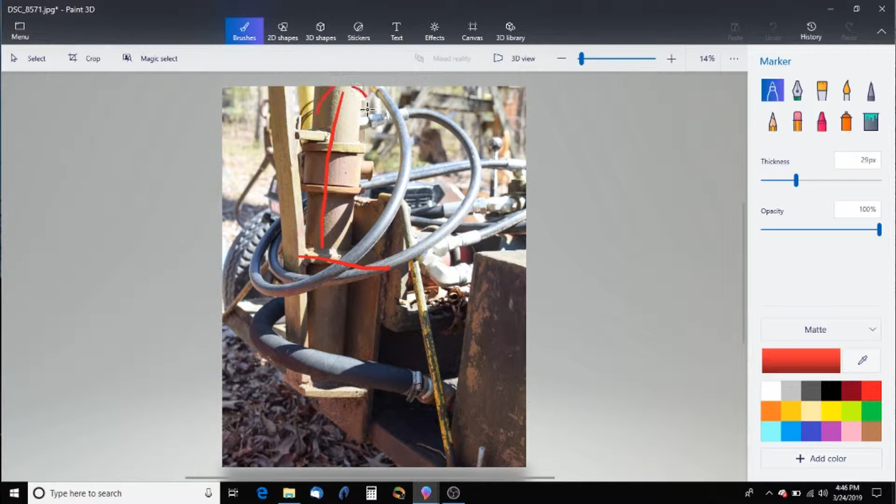The second thing we have is our tube coming down into this plate, and we've got a moment rotating that way for the most part. What happens is we start to form a couple—it's going to push on this side and pull down here. The problem is it's pushing against this plate, and there's not any material on the other side of that plate to take the load.

What we want to do is actually drop this plate down so we can attach right here, into this big member right here. Just push—have that force go right into it.

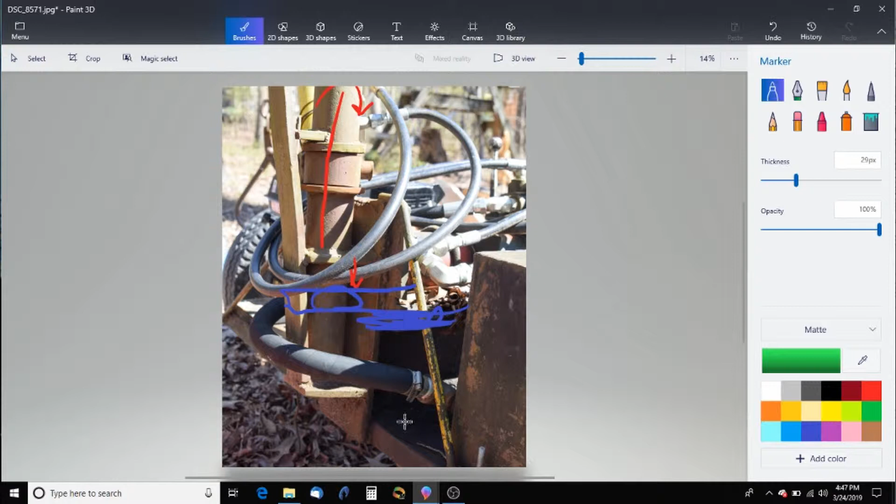We want to do the same thing down below—I'll draw this in green, right here. We find we don't have a tube here, so we need to add a hole for our tube and just weld it right in there. Or, if we don't want to drill a hole in that plate, we can have it sit right down against that surface.

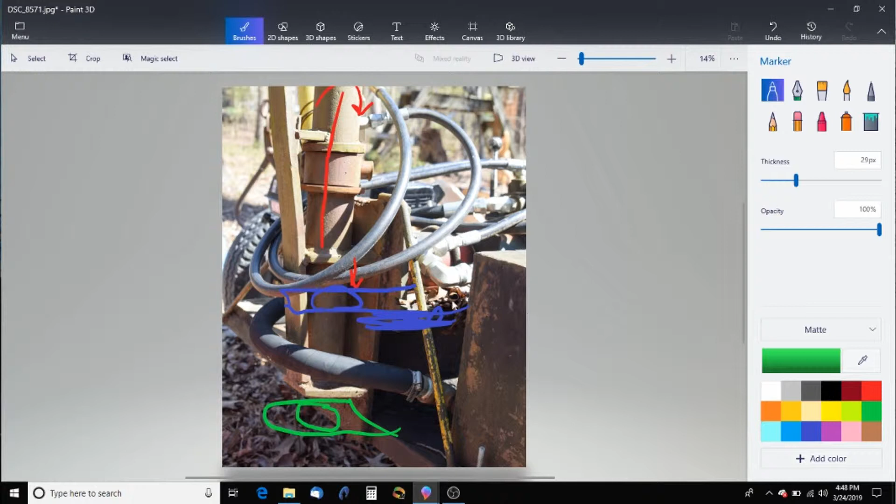Very simple fix. What happens if we do nothing is we just have silly zigzags. Let me draw this a little bit bigger—our force has to go this way and make that turn, and same thing here, has to make a turn. Why make it do that?

Our second one here is right under the cylinder, which you can see up here. We've got this edge on the main structural beam that just gets cut off, but the force and the stress still go all the way over here. Being that it's a vertical plate on the side of our section, it doesn't add too much, so it's not a real structural issue. However, it doesn't have a good transition.

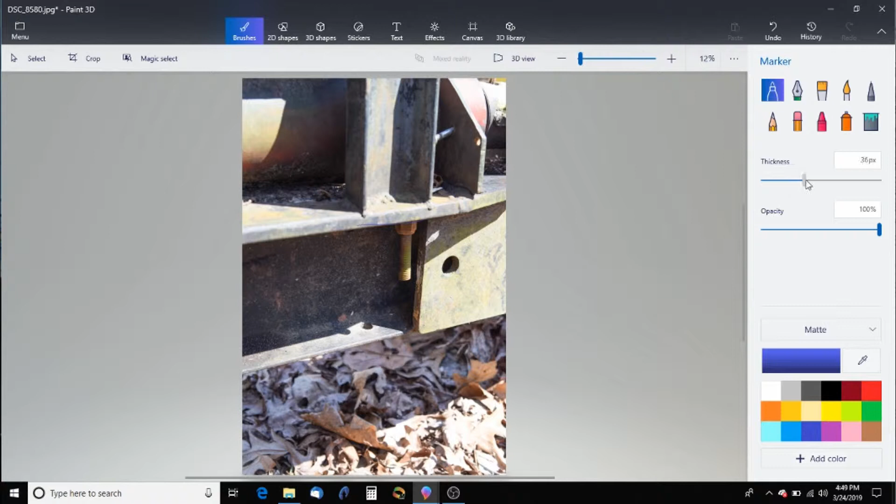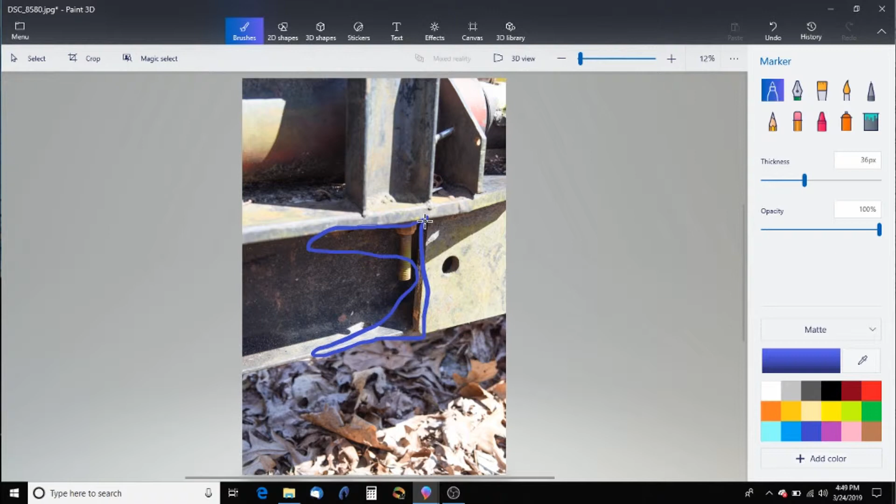We would ultimately want to see our plate have some form here—maybe it looks something like this—so we're not super stiff all of a sudden. We want to match the flexibility of this I-beam with our shapes here, so we have really tapered entrances into the big section, and the same thing up here. Simple thing to do—if you were doing FEM, you'd catch this pretty quickly.

Our next one is actually kind of comical. You can see it's the top view of our cylinder, and we have this plate right here, and another plate on there that holds the cylinder down. Now, I would get rid of these—they're not needed, for the reason that we have this, and this is the part that I find funny: this piece of all-thread right here that's holding it down.

I would highly recommend that you use a U-bolt rather than bending all-thread, for two reasons. One, the all-thread has a plating on it of some kind, even if it's just a white zinc. As soon as you bend it like that, that plating is cracked, and you're going to have red rust forming pretty quickly—you can actually see it throughout the portion.

Now, it looks like somebody painted it before they put it on, so it's not such a big deal. But it is funny. I would highly recommend just spending a couple extra bucks to get a U-bolt. Maybe they couldn't find a properly sized U-bolt.

No matter what, I would also recommend having something in between them to deal with the vibration, because you're going to have the edges of your all-thread rubbing against the cylinder. That is just not a good thing. That's going to rub it in that cylinder. It's going to take the paint off, and you're going to end up with a lot of rust very quickly.

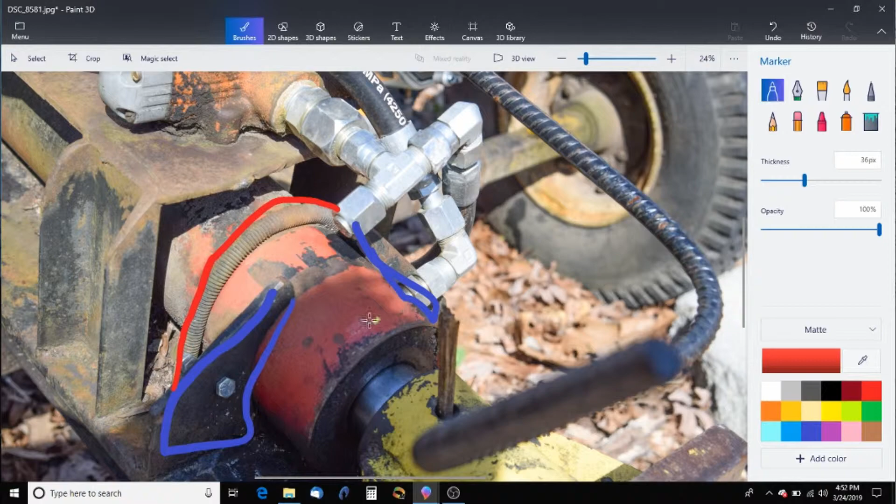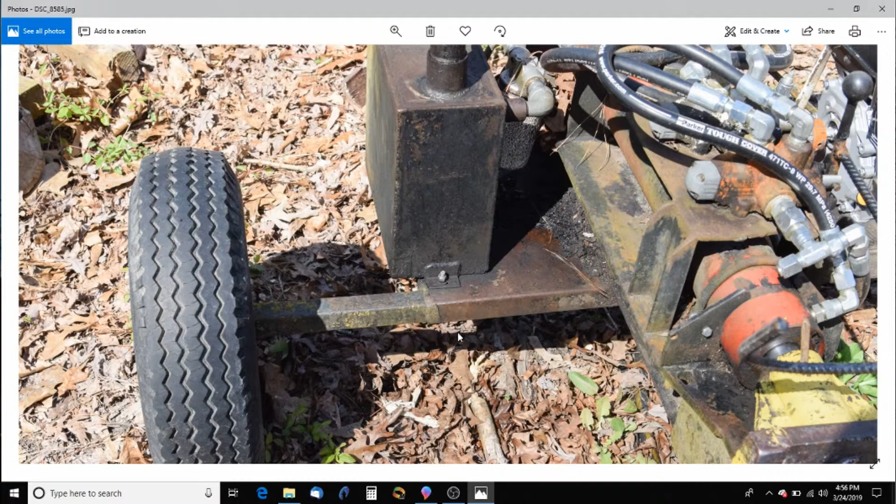Okay, so in this last example, you can see we have our passenger side tire, we've got our axle, and right here we've got a crack. Now let's look closer at this crack right here.

Okay, so our crack, you can see it starts all the way over here, comes in, comes down, and goes all the way to the end of the material. This is just a bend right here over the axle.

Now, I bet you whoever designed this thought they were doing a good thing, welding it right there, but actually they should have just bolted those two plates together, for two reasons.

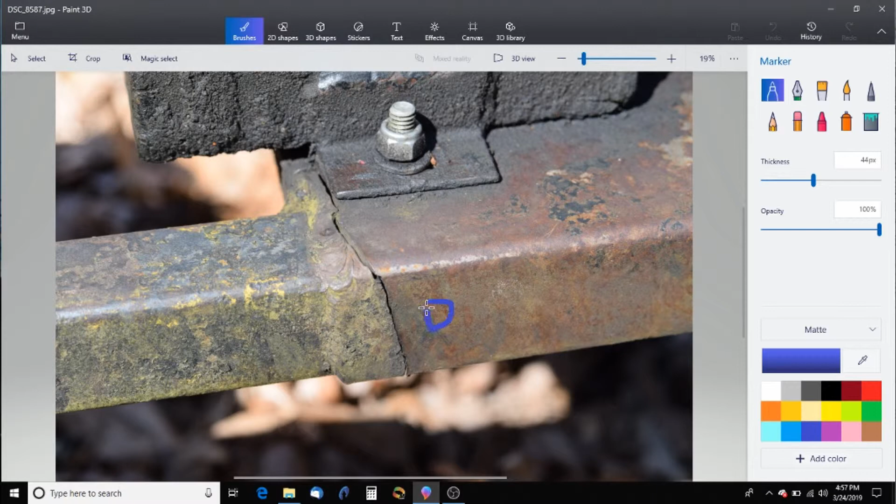And I would put my bolt right here. Just drill a hole, probably a 3/8 bolt would be more than enough. So you want to join those two pieces together on the neutral axis of the axle, and that allows us to not create a stress concentration in the top surface, but allowing it to have a relief, if you will.

So what happens here is axles, you will rarely, if ever, see them welded to something. And the reason is the road vibrations are just so excessive that you can't ever deal with this.

This is why you still have wooden hammers, or wooden-handled hammers, with a compression joint of some kind to a steel hammer head. You would never see them welded together because that weld is going to crack because of the vibrations.

Same thing here. So what you want to have is a joint that can slip a little bit. Back in the old days, they used to bolt and rivet things together, and that allowed them to move just a little bit with vibrations.

When they started welding things together, similar riveted designs would be fine, but welded ones would have cracks and stuff in here. So this is one of those things.

You want to keep those vibration cycles down, and you want to have those things just move relative to each other a little bit. So the force here, you've got the weight of the machine pushing down on the right, and the axle holding it up on the left.